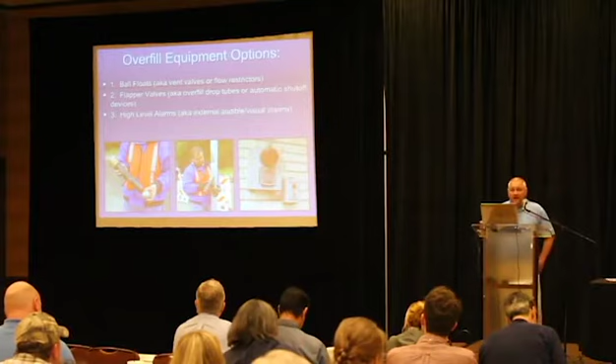So the first thing we're going to cover is overfill equipment. As you guys know, there's 3 options for overfill equipment. For new sites in the non-SPA states, only 2 options, but for the majority of the states that have SPA, you're still allowed to install ball floats, vent valves or flow restrictors. Flapper valves is the second option for overfill, also known as overfill drop tubes, an automatic shutoff device. And your third option is a high-level alarm, typically attached to the tank gauge.

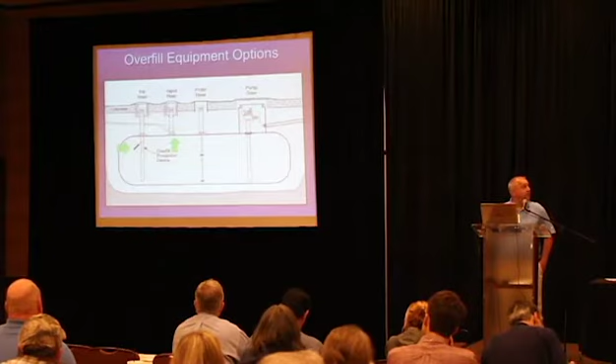So you can see here the ball float valves or vent restrictors are installed in the stage 1 vapor riser that attaches to the tank vent to prevent venting once the tank gets near full. The flapper valves are installed in the fill, and your automatic tank gauge or your high-level alarms are connected to the tank gauge. Just a slide from the recent NEIWPCC webinar.

So RP 1200, Chapter 7, goes through how to inspect and verify the overfill equipment. I'm going to read through the wording in this section. Although the effectiveness of the overfill prevention devices can be tested by attempting to overfill an underground storage tank with product and determining how well the device functions, this approach is not recommended, obviously. Any malfunction of the overfill prevention device could result in a product release that could result in a threat to the public health and safety and environmental damage.

So we don't want to overfill the tanks, so we check and make sure our overfill equipment is working properly. Federal UST rules require that overfill prevention equipment automatically restrict flow or alert the transfer operator when the tank is no more than 90% full, or shut off flow into a tank when it's no more than 95% full.

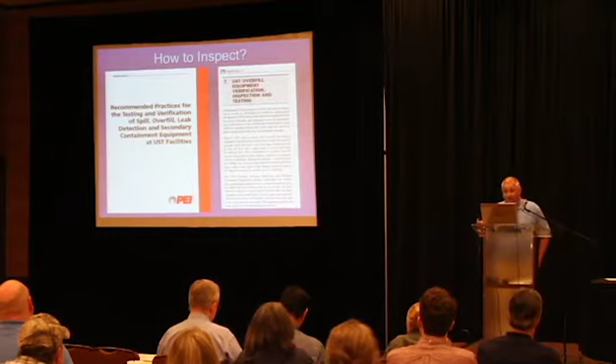There are other alternatives, and many state rules include these alternatives. Other alternatives to prevent overfills include restricting the flow delivery 30 minutes prior to overfilling, typically with a 30-minute ball float, alerting the operator 1 minute before overfilling may occur, or automatically shutting off flow into the tank so that none of the fittings located on top of the tank are exposed to product due to overfilling.

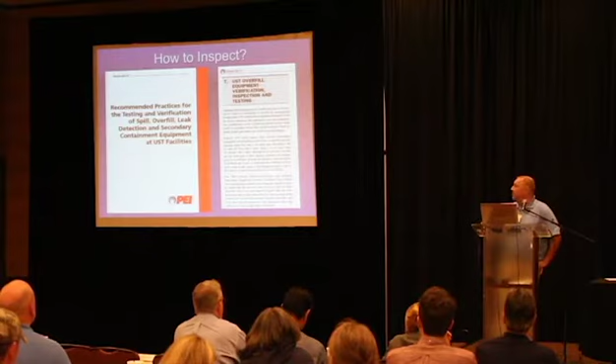The committee understands these were written into regulations, but when developing the standard, trying to figure out how to determine a delivery will stop 30 minutes prior to overfilling, or alert the transfer operator 1 minute before overfilling, or automatically shut off flow so that none of the tank fittings located at the top of the tank are exposed, was very difficult to do. So the committee wrote the practice for automatic shutoff devices to reflect that devices must be set to shut off flow when the tank is no more than 95% full, and flow restriction or overfill alarm devices must automatically restrict flow or alert the operator when the tank is no more than 90% full. We felt this was a more conservative approach when writing the standard, and it would be not simple, but achievable when doing this work in the field.

So here are all of our different options for overfill. The first thing we'll talk about is the flapper valve, or automatic shutoff device. In RP 1200, we say to remove and inspect for damage, make sure the floats move freely, latch mechanisms work, any bypass valves in the device are open, and verify 95% level shutoff. We do that by using the tank chart, looking up where 95% occurs, then determining where on the drop tube shutoff happens, and making sure that is at 95% or lower.

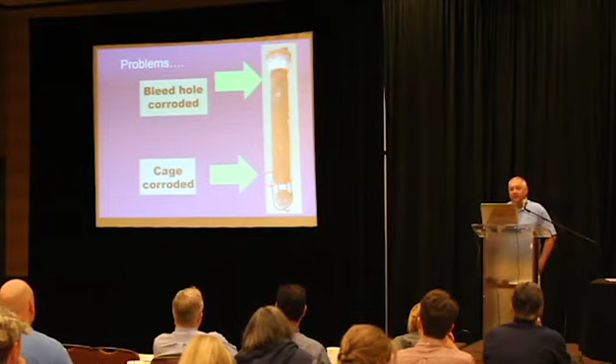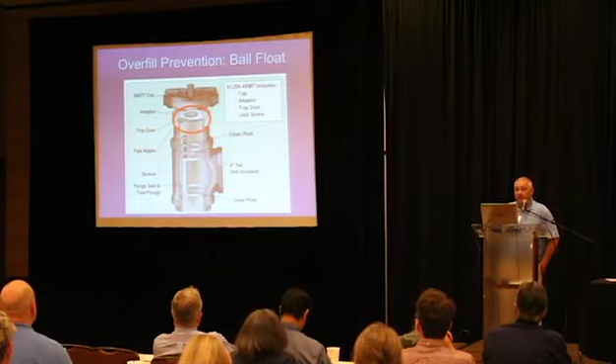Some problems that we see: broken cages. We were just out in North Carolina a couple weeks ago and pulled out a ball float, and the bleed hole was completely corroded through, so we punched a hole back through there so that it worked. If you have remote fill piping, you need to have a trap door assembly to prevent the cap from being blown off in the event a ball float checks up and the fill is occurring, so it doesn't blow the cap off.

So, pass-fail criteria for the ball float inspection: the ball float passes the inspection if the ball float valve functions as designed. Flow restriction occurs when the tank is no more than 90% full and the tank top fittings are vapor tight. If any of the following conditions exist, the overfill prevention system fails the inspection.

Ball float valves are installed in a storage tank that is equipped with suction pumps and air eliminators. As you guys should know, that's an incompatible system design with a ball float for overfill. If the ball is cracked or damaged, that's also a failure.

One thing that we added in the 2017 version of RP1200 is if the ball float cannot be removed, it's going to fail the inspection. The committee felt strongly that it's very important that the ball floats come out. You can't just put a flashlight down there and see that it's there—you might be able to see that it's there, but you can't necessarily make sure that it's functioning properly. So we felt it was important that this bullet point be put in there, that the ball floats need to come out to be visually inspected.

The orifice is not at the top of the assembly, or it's clogged with debris or corroded, which we saw just a couple weeks ago. If ball floats are installed with coaxial stage 1 vapor recovery, the ball float does not work with stage 1 coaxial, because the ball float is bypassed.

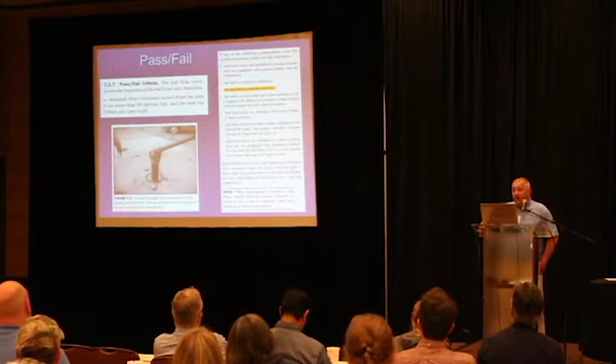Ball float valves are used on tanks equipped with remote fill pipes and gauge openings without the use of the trapdoor device that you saw on the slide previously. Ball float valves are installed in storage tank systems that are also equipped with an automatic shutoff flapper valve, and the ball float valve is set to restrict flow before the tank is 95% full. If the ball float valve does not function as designed, flow restriction doesn't occur, or it occurs at a higher level than 90%, or the tank top fittings aren't vapor tight, then the ball float valve fails the inspection.

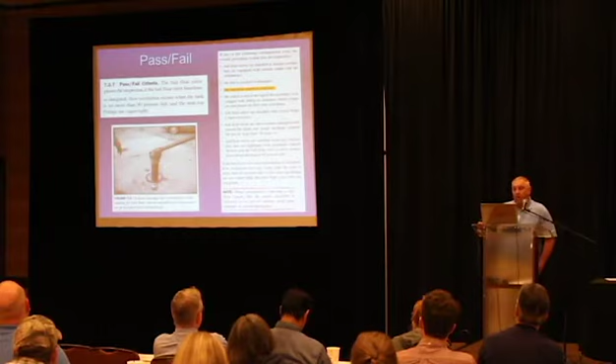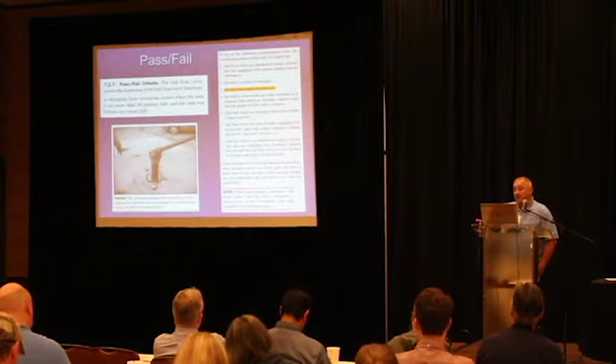One note that, again, the committee felt was pretty important: when permanently removing the ball float assembly, ensure the entire assembly is removed so as not to interfere with other methods of overfill protection. What we've seen in the past is contractors want to get rid of the ball float, so they'll just take a stick and pop the ball into the tank. Unfortunately, that leaves that riser sitting in the tank.

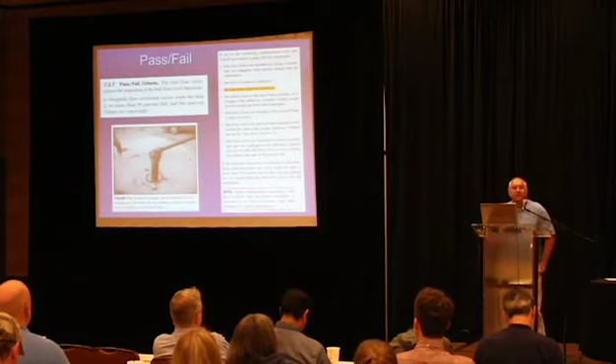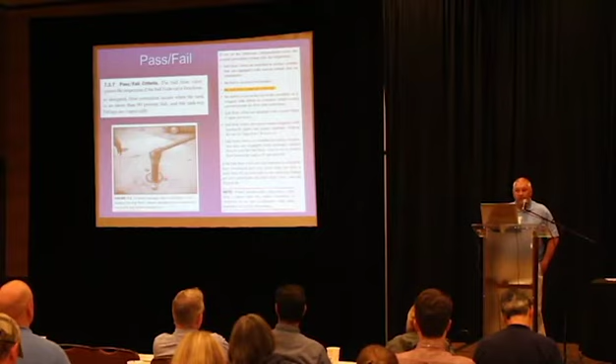And if you have a 90% ball float and a 95% flapper valve, once the tank hits 90% full, the flapper valve doesn't engage, your fuel is going to be going up into your vent line through the ball float assembly if the ball is just knocked out. So when contractors are removing it, you should make sure that they're removing the entire assembly.

All right, moving on to overfill prevention, the high-level alarms. In RP1200, we say compare the ATG fuel level to the stick level. So you're going to pull out the probe, stick the tank where the probe is, and compare the levels. Check that the overfill alarm is on the tank gauge. We're going to actually activate the overfill alarm by removing the ATG probe, sliding the float up to activate the alarm, and make sure that the float height is at 90%.

The pass-fail criteria is pretty simple. If the overfill alarm activates when the tank is no more than 90% full, the overfill alarm passes the test. If the fuel level on the console doesn't agree with the gauge stick reading, the system fails the test. If the overfill alarm does not activate in test mode, it fails. If it activates above 90% tank capacity, it also fails. It's pretty cut and dry.

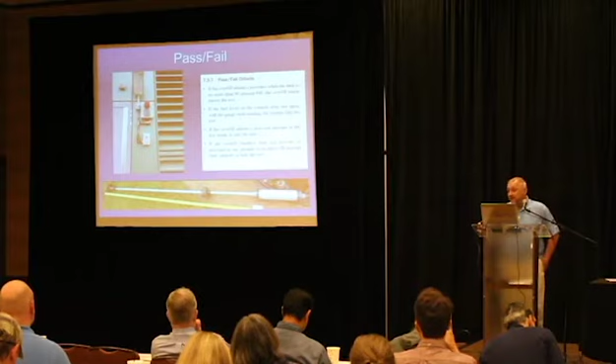There are sample forms for documenting your overfill inspections in RP 1200. You could also look at some states, such as North Carolina, which has developed a form for inspecting and testing these overfill devices. So if your state is looking for some forms for documenting it, there's two sources right there.

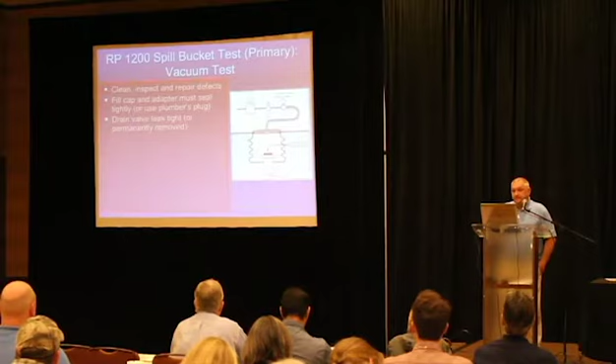So now moving on to the vacuum test. If we're going to vacuum test the bucket, again, we're going to clean, inspect, and repair any defects. We're going to want to make sure that the fill adapter, the cap, and everything's tight. The drain valve is isolated or it's permanently removed. We're going to seal the test cover to the top of the spill bucket.

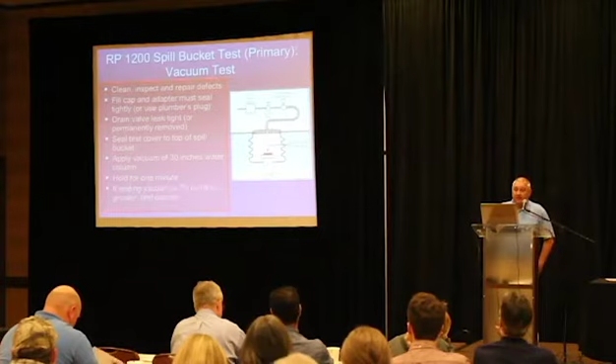30 inches of water column.

So what about double wall buckets? Do we need to test, or is a test of the primary going to be acceptable? This is something that you want to consider as you guys are rewriting your rules and providing guidance to the testers and the tank owners out there. So would a test of the primary bucket in a double wall spill bucket be considered acceptable? We've gone through this in the state of Maryland, and the answer is no.

So we must vac test double wall spill buckets in Maryland. Do you even have to test the interstitial? Maryland says yes, something you want to consider when providing guidance to the people doing this work, because these questions are definitely going to come up. So if the spill bucket is double wall and monitored monthly, no test is required according to the new federal regulations. Florida, you still need to test every 3 years. Maryland, it's still an annual test. How's your state going to go with that?

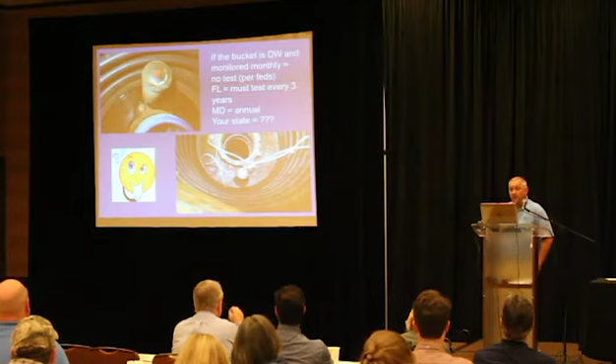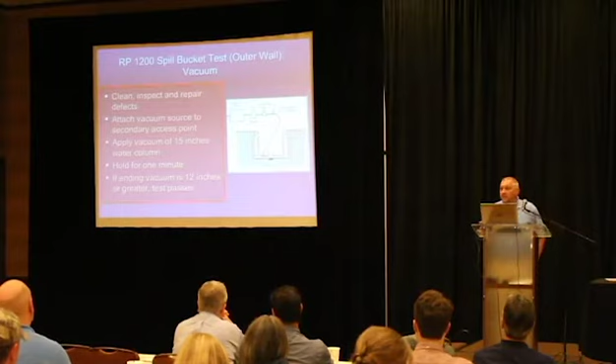So for testing the outer wall of a bucket, RP 1200 has a protocol for that. Again, clean, inspect, repair. Attach the vacuum source to the secondary access point. You're only going to apply 15 inches of water column vacuum. We're going to hold for 1 minute, and if the ending vacuum is 12 inches of water column or greater, the spill bucket interstitial passes the test.

So again, what about stage 1 vapor recovery buckets? EPA says no, Maryland says yes. Think about the guidance that you're going to provide. What about testing spill buckets in a contained sump? Another question that comes up.

So we're going to move on to the big elephant in the room, containment sump testing. According to the new federal regulations, if interstitial monitoring is used for release detection on double wall piping, you're going to need to test your single wall tank sumps and dispenser sumps for tightness at installation and every 3 years thereafter. You're using that containment sump under the dispenser and back at the tank to contain a release. You need to make sure that it's liquid tight.

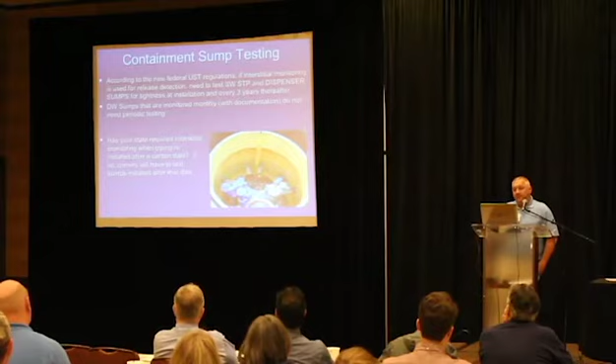Double wall sumps that are monitored monthly with documentation, according to the federal regulations, just like spill buckets, don't need to be periodically tested. As long as the owner is checking his sumps monthly and making sure that the interstitial space is in working condition and in normal condition. One thing to think about: has your state required interstitial monitoring when piping is installed after a certain date? If so, the owners really don't have a choice. They're going to have to test their sumps.

If testing, you can follow manufacturer's guidelines, RP 1200, or if the state develops a standard, follow that as well.

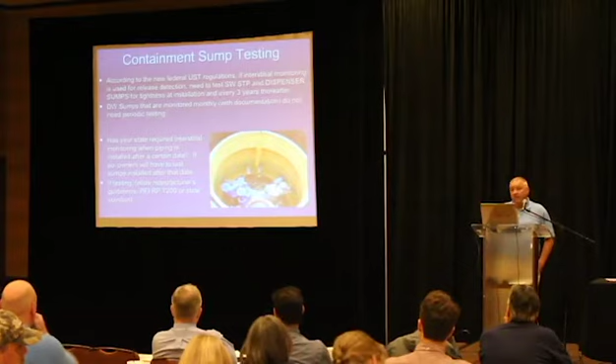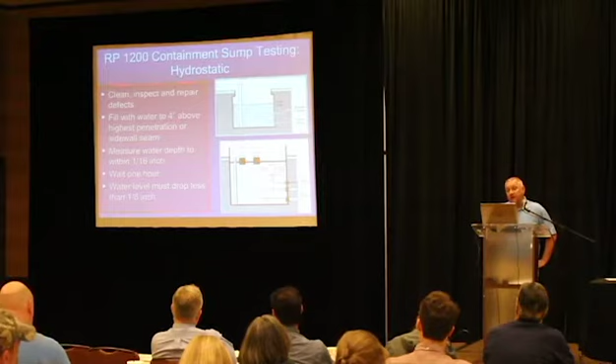According to RP 1200, here's what we say to do. Just like your spill bucket, you're going to clean, inspect, and repair any defects in the sumps. You're going to fill the sump to 4 inches above the highest penetration or sidewall seam in the sump. Measure the water to a 1/16 of an inch, wait 1 hour, and the water level has to drop less than 1/8 of an inch for the containment sump to pass.

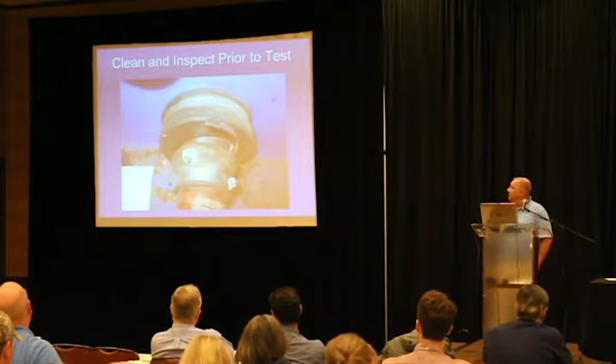Again, clean, inspect prior to testing. We do see boots that go bad, so those would need to be fixed prior to doing testing. You don't want to flood the entire system from the dispenser sump down to the tank sump and put water in your piping interstitial. So you want to seal off the sump from the secondary piping.

So these are small things we see in the sumps. You fill the sumps up 4 inches above the penetrations. Again, 1200 has test documentation in the back of the document that you can use.

So what about testing sumps that contain spill buckets or no pipe? Is your state going to require all sumps to be tested, not just sumps used for release detection? According to EPA, no, it's only the sumps that are being used for release detection. State of Massachusetts, state of Maryland said test all sumps, make sure they're all liquid tight. So again, it's one more thing to consider as you're writing your rules. Are all the sumps going to need to be tested?

So as you guys know, and as everybody knows, and it's been a lot of talk about this lately, PMAA put out a regulatory report providing an alternative method for testing sumps, low-level testing. There were a lot of comments submitted to the RP 1200 committee regarding low-level testing, including myself. That was something I felt we needed to discuss. We discussed it several hours in the first go-around of developing the document, and we went around and round again, and we basically reaffirmed what we thought. As an industry best practice, we felt testing 4 inches above the penetrations and sidewall seams was the best way to go.

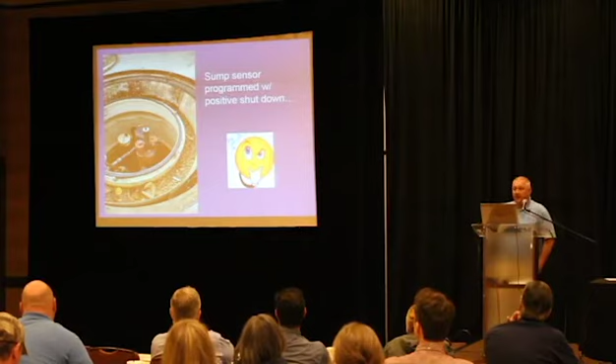So just thinking about that, here's a picture that was emailed to me a couple days ago, a sump sensor programmed with positive shutdown, and that's the position it was in.

EPA clarified PMAA's request. Water can be reused for spill bucket testing, or for sump and spill bucket testing. We're going to get into that this afternoon. I would strongly suggest that you not just read the PMAA document here. Go to EPA's website and look at their clarification on their frequently asked questions on this low-level testing.

So I had mentioned Massachusetts put it in their regulations. In 2015, they gave all owners 2 years to comply to test all their sumps. And they said test all sumps, and if you have a sensor, you only have to test to the level that the sensor activates. Sumps that don't have a sensor had to be hydrostatically tested to the top of the sump. Standard for declaring a failure was the same as RP 1200, was an 1/8 of an inch or greater loss.

So I ran the numbers, and I presented this data several months ago at one of Marshall Mott Smith's conferences. I ran the numbers for the sump testing that we did in 2016 in Massachusetts. We did very little in 2015 because owners were kind of waiting until the last minute. And this is what we saw.

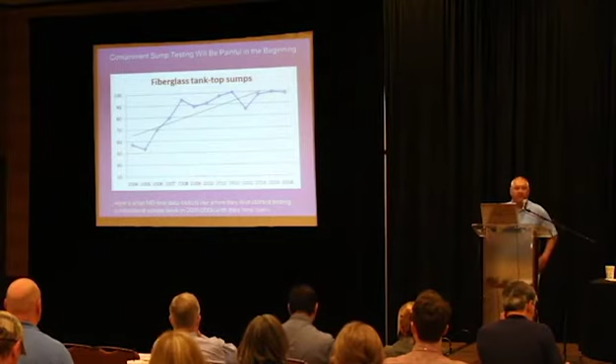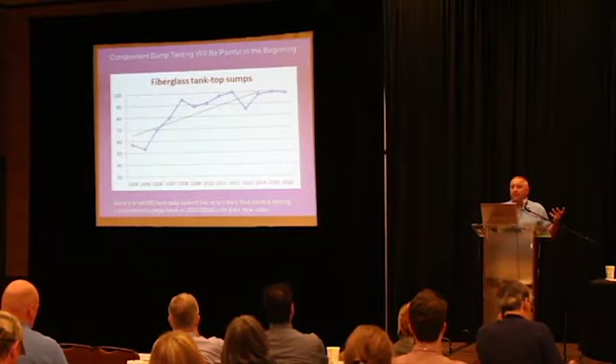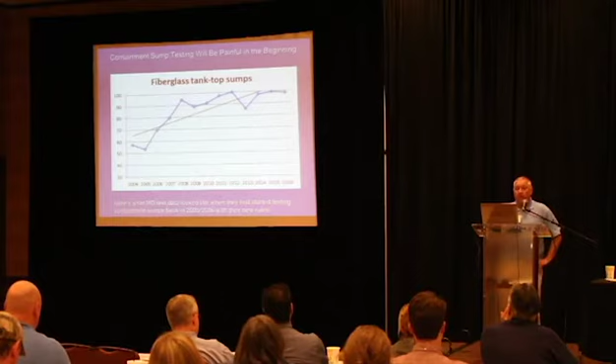In comparison, I'm going to share with you, a lot of you have seen this data before. I've done it at the Tanks Conference. I've done it at a few other conferences. We've tracked our data for testing in Maryland when Maryland's regs first came out. The RP 1200 protocol for containment sump testing was basically copied right from Maryland. We felt it was the best practice. A lot of regulations say containment sumps have to be liquid tight on the bottom, penetrations on all sides. So we felt that what we put out there was the industry best practice.

So our Maryland data for fiberglass tank top sumps, as you can see, just between 50 and 60% passing rate on the first go around.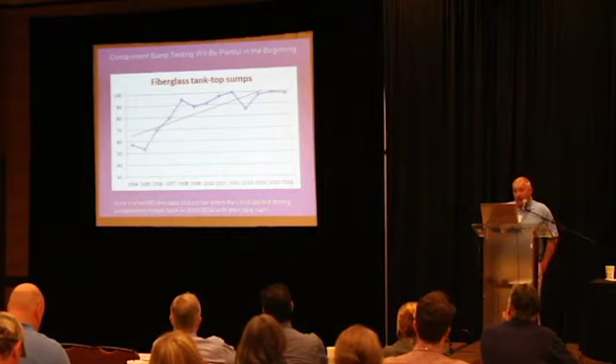And then over time, as you see, the testing got better. But it was rather painful in the beginning. For your plastic tank top sumps, they didn't fare quite as well as the fiberglass sumps. Just above a 40% passing rate in the beginning, but again, things got better over time, and we're seeing around a 90% passing rate right now.

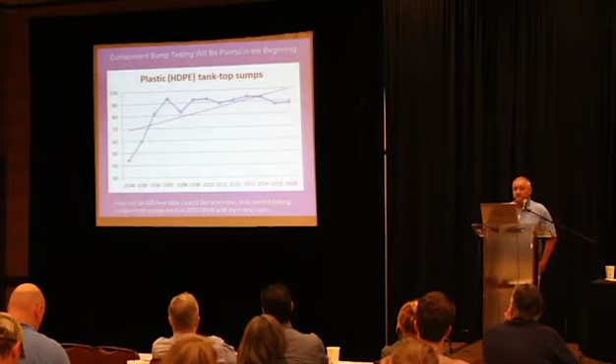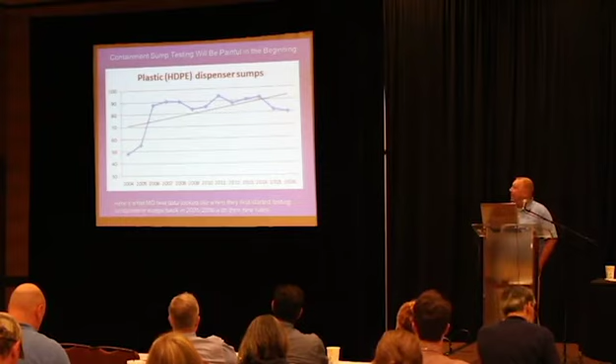Dispenser sumps, again, started just under 50% passing in the beginning, and fare pretty well, 90. It looks like we're having a little tail off the last couple years.

I wanted to leave plenty of time at the end of the presentation to talk about this, because I figured there's going to be a lot of questions, a lot of concerns, with all this testing and inspections that are going to go on. I had a question for the audience: with all the states being here, are any other states considering the low-level containment testing?

I was also concerned a little. It's a good option. It's not a great option, because if you have sensors in the dispensers, you're shutting all products down, essentially, too. Or if there's connectivity between the secondary piping. So somebody may choose to do that. We've seen that done on some above-ground tank systems. We've had that in place prior to this, and we've allowed that as an option. So that seems to have worked out there.

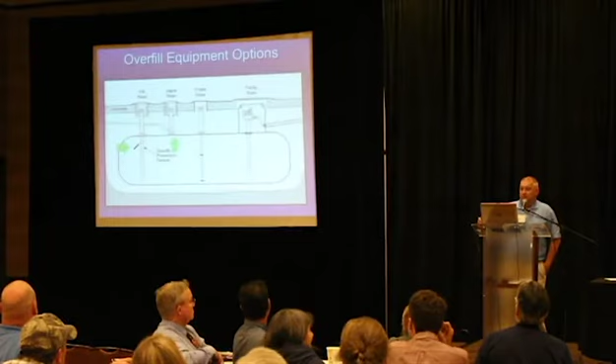Where our technician is there, you can see when this owner actually had short ball floats installed in the tanks as well, for a backup. So even though the tank didn't have a functioning flapper valve in the tank, they did have a secondary means just in case. So some owners like to have the belts and suspenders backup.

So yeah, correct. Okay, Ed, I've got a question and I guess a comment for regulators as well. Did you consider or discuss tolerances for making the measurements on, particularly, a flapper valve? You know, if you've set these at 95 percent, and if a contractor went out and did 100 of them right at 95 percent, there's probably, if you put a bell curve on it, about half of them are going to be an eighth inch too long and half about an eighth inch too short.

So what are the reasonable tolerances, if any? If you get one that's like 95.3%, or if it's an 1/8 inch too short, it's got to be 95 or lower. We've seen inconsistencies in measurements over the years, so I guess to be safe, install it a little lower. Just as a comment, if regulators are putting in rules, that's something to consider. For the manufacturers or contractors here, in order to pass these 3 years from now, you probably got to put them in at 94%, to be safe. Just a comment.